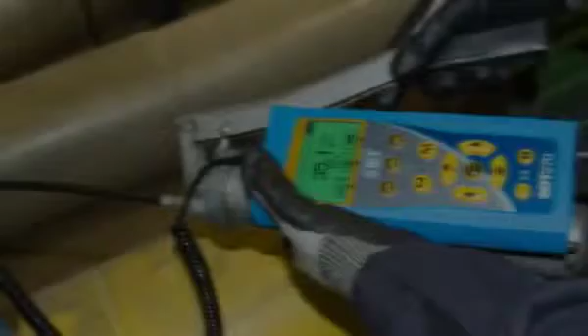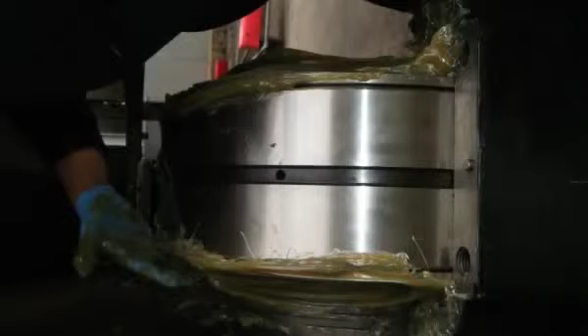Lubricating rolling bearings is one maintenance task that deserves our attention. For those involved with reliability, asset longevity, and energy conservation, getting this job done right means everything. Still, lubrication of rolling element bearings remains a misunderstood and abused task. Can it be true that 40% of all bearings never live to their engineered life cycle, and bad lubrication practices are the leading cause of this infant mortality?

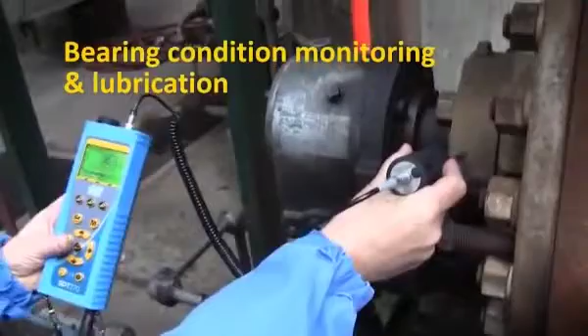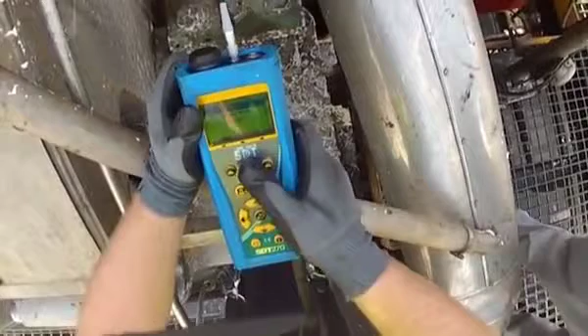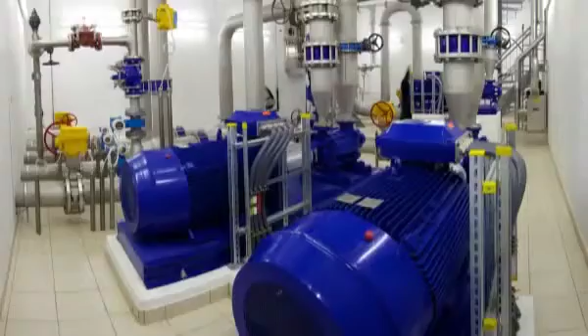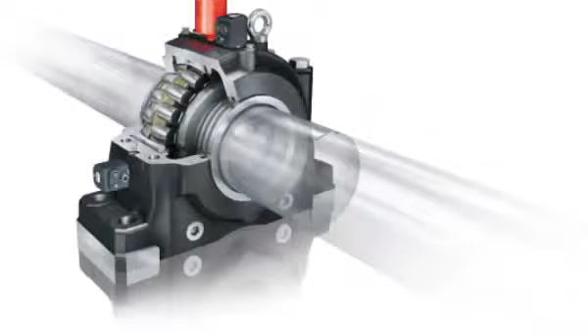Friction is all around us. Without it, we'd find it very difficult to run, walk, or even stand on our own 2 feet. We need friction to drive our cars and fly our airplanes, and we need friction for our motors to drive pumps. But when it comes to our plant, machinery friction is both friend and foe. If part of your job is greasing plant machinery, then you know well the battle against frictional forces that threaten the useful life of rolling element bearings, and you definitely want to avoid these 3 common lubrication mistakes.

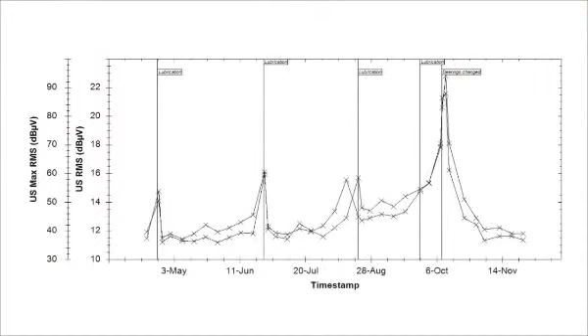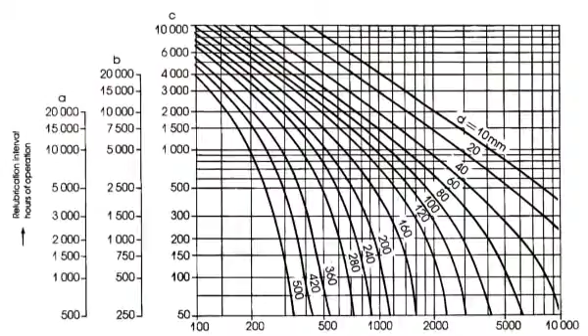Mistake number 1. Scheduling lubrication tasks on a calendar basis instead of a conditional basis. Greasing a bearing once per week or once a month may seem like a sensible thing to do. After all, performing scheduled maintenance at regular periods is an age-old concept ingrained early on. Even OEMs still advise best practices based on time intervals to ensure maximum asset lifespan. Are they right? Or does their advice steer us in the wrong direction?

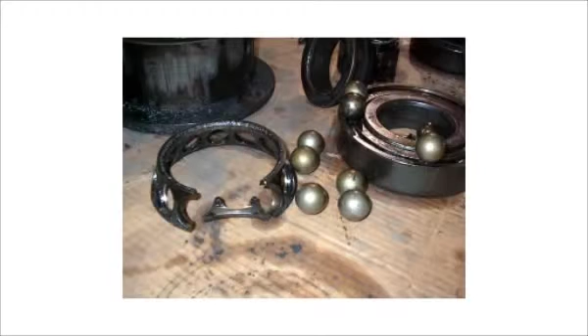Bearings need grease for one reason only, to reduce friction. As long as the lubricant is performing that service well, there should be no need to change it or add more. Yet we frequently do, with potentially catastrophic results. Relubricating a bearing just because your calendar told you time's up is the first mistake you must avoid. Don't let your calendar overrule common sense. Instead, monitor, measure, and trend friction levels and predict precisely the right time to grease.

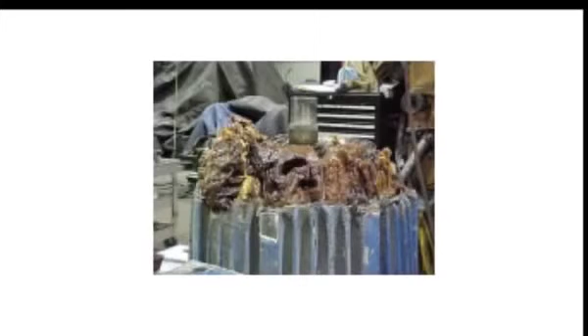The second mistake is adding the wrong amount of grease. Sometimes we add too much, other times not enough. Both are wrong. Too much grease builds pressure, pushing the rolling elements through the fluid film and against the outer race. The bearing has to work much harder to push the rolling elements through a mud bog of grease.

Imagine for a second you're running along a beach, ankle deep in water. Your legs effortlessly drive your feet with each step, while a small amount of water splashes coolly around your ankles. You feel as though you could run forever and never get tired. Now imagine running knee-deep or even waist-deep in water. Your legs tire quickly. The water surrounds you and makes movement feel awkward and unnatural. You might grunt, you might groan and strain until, after a few seconds, you give up from exhaustion.

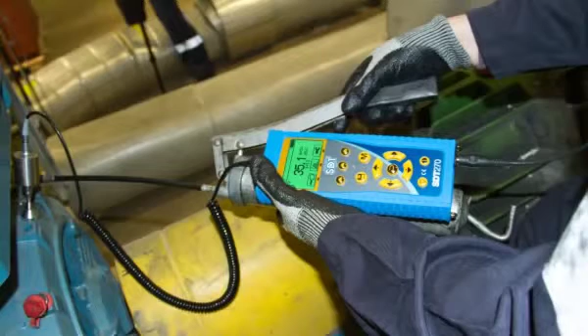A bearing drowning in grease will run hot. Excessive heat breaks down the grease. The whole system is an inefficient waste of energy. How do we avoid this mistake and stop at just the right amount of grease? By monitoring the bearing's friction level with ultrasound as new grease is being applied. As new grease flows into the bearing cavity, a measurable change in ultrasound levels is measured, heard, and recorded with an SDT LubeTech kit. As the decibel level approaches normal baselines and stabilizes, you know only the needed amount of grease has been added.

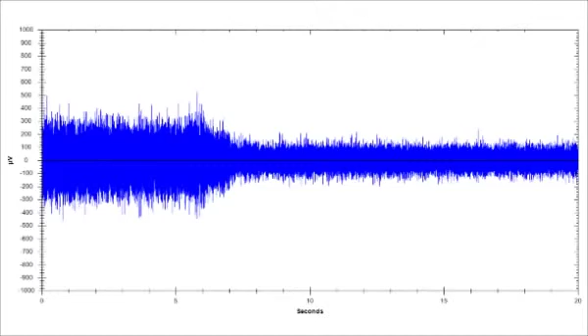Like any job, there's a right way and a wrong way to do things. Simply listening to a bearing with an ultrasound device that gives no quantitative feedback is a recipe for disaster. The audible feedback is too subjective to draw any comparative conclusions. No 2 people hear the same, and there's no way to remember what the bearing sounded like a month ago.

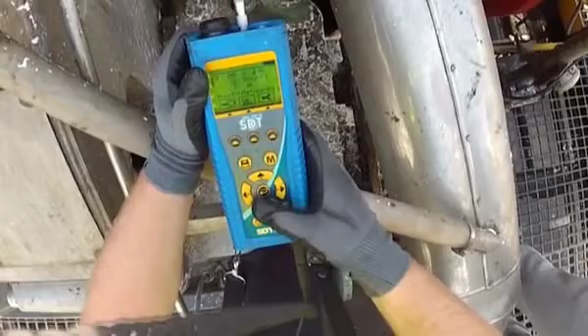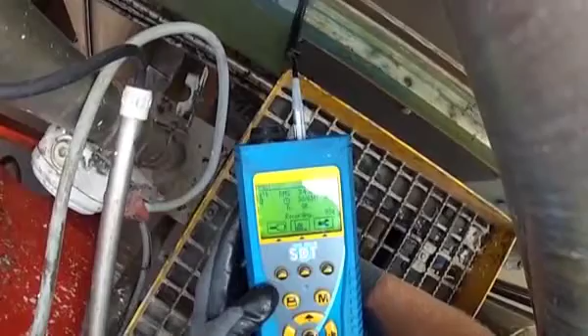So what's mistake number 3? Sacrificing quality for price. Always use an ultrasound instrument that provides a digital decibel measurement. Do not rely on stethoscopes, screwdrivers, and listen-only ultrasound instruments. Better still, use a device that provides multiple condition indicators. Max and peak RMS decibel measurements indicate alarm levels and greasing intervals, while ultrasonic crest factor provides insight about the bearing condition in relation to its lubricant. Crest factor helps us differentiate between bearings that need grease and bearings that need to be replaced.

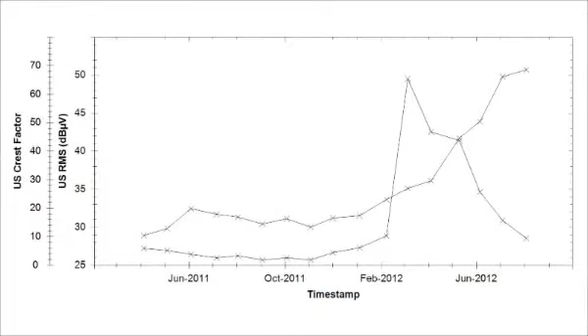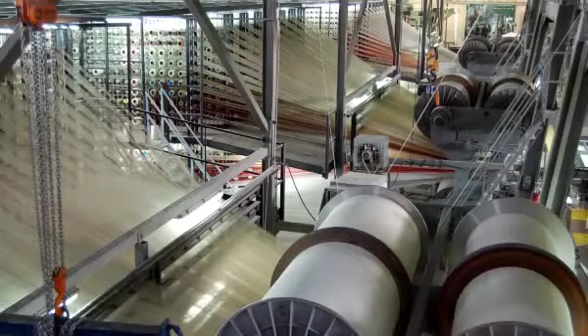Bearings reside in noisy places. Deafening, really. So many sources of noise coming from all directions. Humans are simply incapable of filtering the sound of a grease-starved bearing from other sounds. Even if we could, how would we measure the results? How can we compare what we hear today against what was heard a month ago?

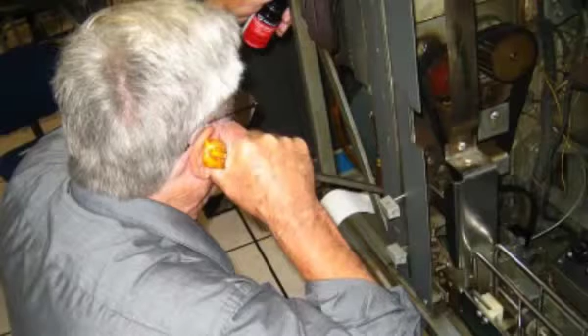The days of listening to a bearing with a stethoscope, screwdriver, or broomstick are over. There's just too much at stake to rely on antiquated methods. But noisy environments are where high-quality ultrasound instruments thrive. These are the challenging situations they were built for.

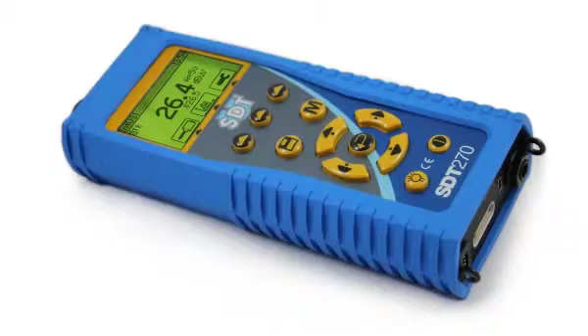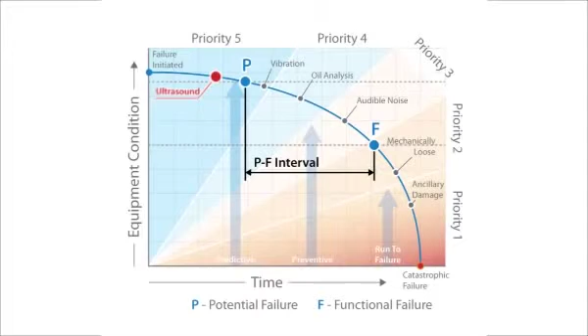Take, for example, the SDT-270. It hears above the noise of the factory floor and concentrates on a narrow band of ultrasonic frequencies. Friction and bearing defects first reveal themselves in this frequency range. The SDT-270 accurately filters, measures, stores trends, and alarms the earliest signs of lubrication and bearing failures, making it the ideal tool to predict greasing requirements.

It does so by providing 4 relevant data sets we call condition indicators. Condition indicators characterize the health and performance of a machine and provide more insight as to what has changed. The first condition indicator is overall RMS, reported in decibels per microvolt. Overall RMS is an averaged calculation of negative and positive values collected over a specified sample time. That sample time is defined by you, the ultrasound inspector.

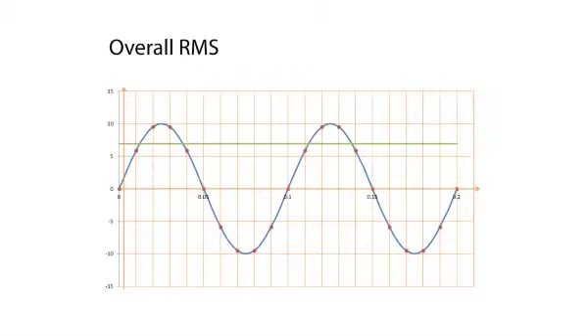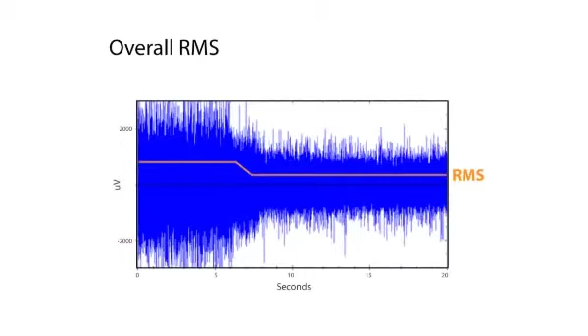The SDT-270 reports the RMS by buffering 250,000 samples per second. This condition indicator characterizes the energy inherent in the ultrasound signal. RMS incorporates both friction and impulsive ultrasound over the sample time. It's a stable and repeatable value, making it an ideal value to trend and alarm to.

The next condition indicator is max RMS. We also calculate that in decibels per microvolt. The SDT-270 actually calculates RMS 2 ways. The first I just described. It's an overall value for a specific time frame sampled at 250,000 samples per second.

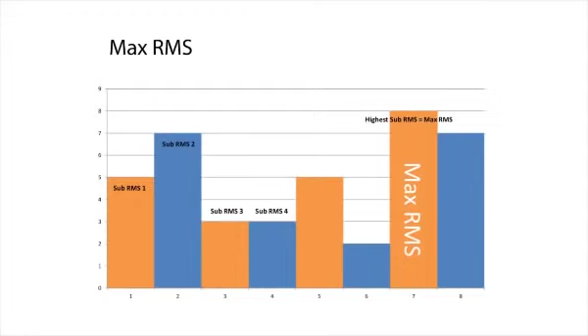The second we call a sub-RMS. The sub-RMS consolidates the RMS into blocks of data 250 milliseconds long. So an RMS collected over 1 second would contain 4 sub-RMS blocks. The loudest block reported represents the max RMS. The max RMS is used to compare against the RMS to determine if the signal is stable.

The next condition indicator we call the peak value. It's the maximum instantaneous value recorded during the measurement cycle. Since the SDT-270 takes 250,000 samples per second, the peak condition indicator is extremely sensitive to any abrupt variation. This makes it really useful for detecting impacts produced by early stages of bearing failure.

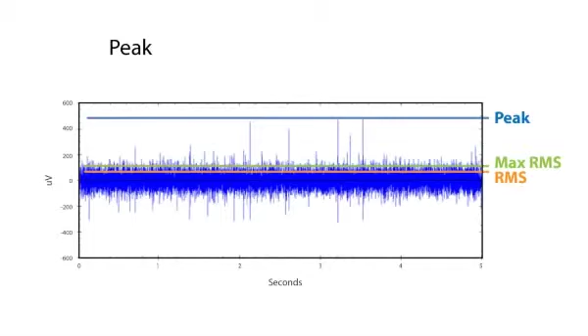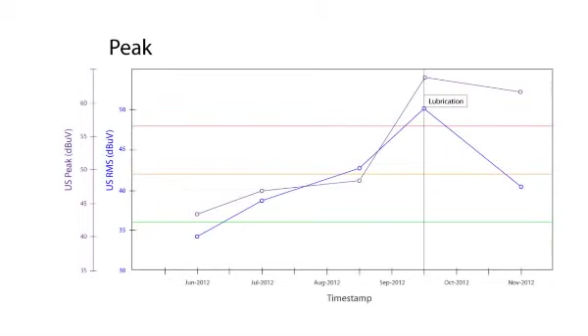For example, let us say that an alarm was triggered when the RMS value exceeded 8 decibels per microvolt over its baseline. If lubricating that bearing returns its RMS condition indicator to baseline, but the peak value remains elevated, this is an indication that the alarm was triggered by more than just lubrication issues. The bearing is entering early failure stages.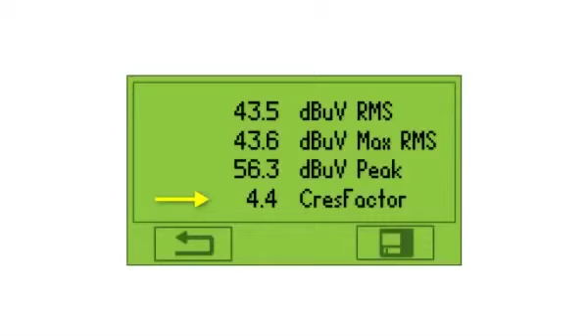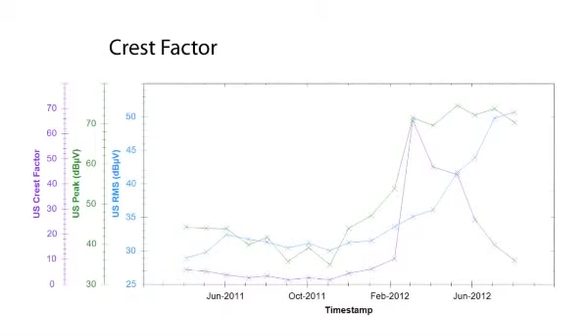The fourth condition indicator is crest factor. Crest factor is simply calculated by the SDT-270 as a linear ratio of the peak value to the RMS value. The beauty of the crest factor is how it reacts to unstable bearing signals. This makes it useful for estimating the failure severity of bearings and gears.

When ultrasound inspectors put all 4 condition indicators to work, they have the power to predict lubrication requirements based on condition instead of time. RMS tells us when to grease, and more importantly, when to stop greasing. Max RMS and peak give an indication that an increased RMS value may be more than just friction at play. Crest factor helps track the evolution of failure from first to final stage. SDT's condition indicators present a fuller picture of bearing condition and take ultrasonic decibel metering to a new level.

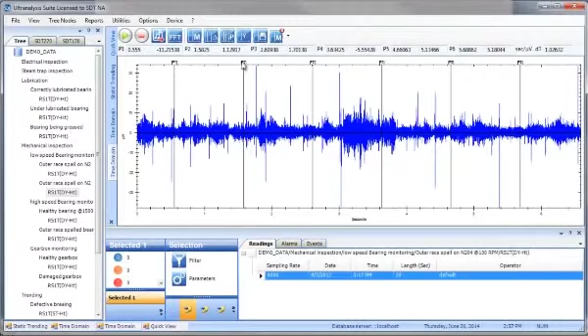For those who want analysis beyond static condition indicators, SDT offers dynamic data analysis. Static condition indicators are useful for trending and alarming, but dynamic data analysis goes deeper and provides a visual representation of the ultrasound signal. Ultrasound data presents well in the time domain. Visually, it helps explain changes in static condition indicators.

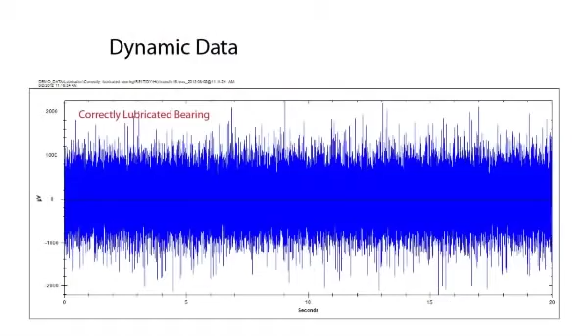To demonstrate, let's take a look at two identical bearings. One of the bearings is correctly lubricated and the other is under-lubricated. We captured dynamic signals 20 seconds in length for each bearing. The first thing we need to do is scale the y-axis of each time graph identically so we can compare them side by side meaningfully. Let's look more closely at the correctly lubricated bearing first.

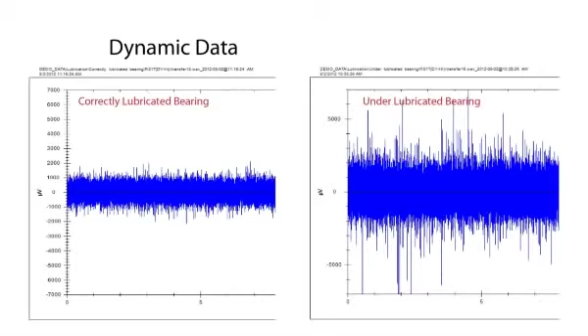The static RMS condition indicator is 51.2 decibels per microvolt, and the max RMS is similar at 51.7. A peak ultrasonic value of 67 is notable, but not alarming, and the crest factor is 6.17. Now compare this to the companion under-lubricated bearing.

Overall RMS of 57.8 and max RMS of 58.7 is about 6 decibels higher than the correctly lubricated bearing. The friction level is 2 times higher in the under-lubricated bearing. The peak level is 12 dB higher, which is 4 times higher than 67.

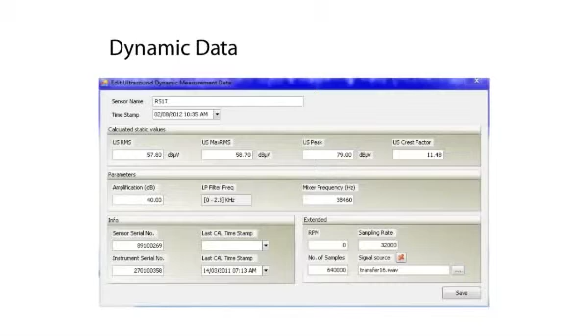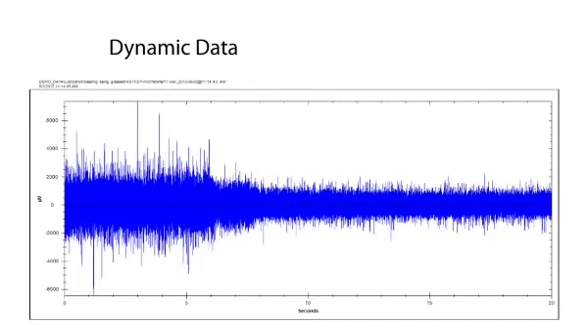Let's take a look at creating an ultrasound greasing program. Success is dependent on organization and commitment. Without these two structural elements, your ultrasound lubrication program will find difficulty getting traction. However, with well-organized execution, the program will be on a solid footing from the outset.

Getting the commitment from all levels comes much easier when a program can demonstrate structure and cohesion. Results will prove the program faster, which will trigger easier access to funding to grow and sustain the program. There's only one clear way to create organization around a project, and that's to define goals. So start by asking, why are we starting an ultrasound lubrication program? And what rewards do we expect to reap?

There is no one easy answer to that question, and probably several that make sense. Saving money is an obvious benefit that gets the attention of management, but it's not specific enough. How will an ultrasound lubrication program save your company money? By reducing grease consumption, by raising awareness of the right types of grease to use, by making more effective use of lube tech's time, by extending bearing life, by decreasing energy consumption from overgreased motors, by contributing to a mentality of best practices that positively infect other aspects of your business.

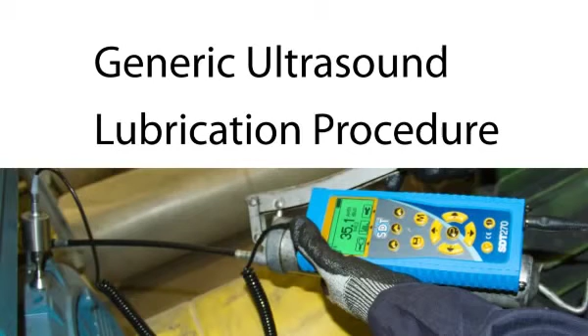SDT has published its recommended best practice for lubricating bearings on an ultrasound condition basis. Every plant is different, but there are basic similarities that make a general procedure for ultrasonic lubrication relevant. This general procedure is meant as a guideline to be used to build out a more specific procedure for you. This may be an exercise best undertaken with the guidance of your ultrasound implementation consultant. At the end of this presentation, you can request your own copy of SDT's ultrasound lubrication procedure.

How often should machines be greased? Well, there's no easy one-answer-fits-all to this question. Presuming that full faith in ultrasound condition-based relubrication is engaged, we can approach the answer with this simple logic. Why do bearings need grease? To reduce the frictional forces between the surface of the bearing's rolling elements. Okay, so when does new grease need to be added to a bearing? When the bearing's frictional forces increase beyond a set quantifiable level.

What is a reliable and easy-to-use technology that determines changes in frictional forces? Ultrasound. Back to the original question then. How often should machines be greased? The answer must be when your ultrasound technology reports an increase that's 8 to 10 decibels louder than your established baseline. Knowing that 6 decibels over baseline represents a 2 times increase in frictional levels, 8 to 10 decibels RMS is logarithmically and logically an intelligent point to create a relubrication interval alarm.

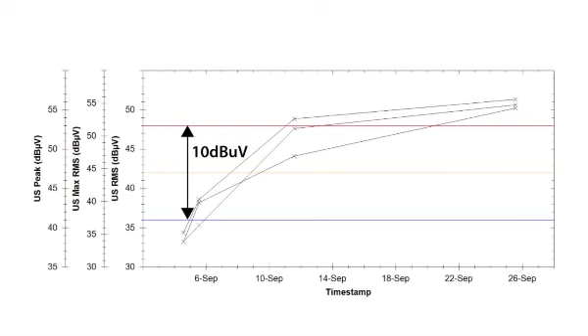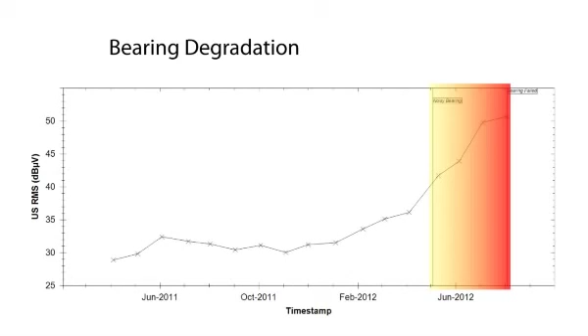This sample trend graph shows a bearing's degradation over a 12-month period. The baseline ranged between 29 and 32 decibels for the better part of 10 months. Around May 2012, the bearing breached the 40 decibel mark for the first time. That represents an 8 to 10 decibel increase over baseline. This should have triggered an alarm for intervention. Lubrication of the bearing at this point to return it to baseline may prevent a further breach above 50 decibels and the next stage of bearing failure.

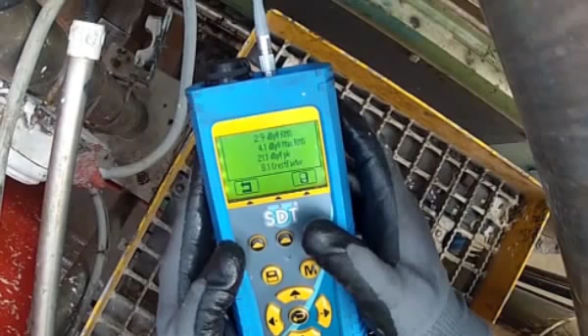Avoid these 3 common mistakes. Grease on a conditional basis rather than a time basis. Add the right amount of grease without over-lubricating. And use a digital decibel metering ultrasound detector instead of a listen-only tool. Now, you're well on your way to establishing a world-class condition-based lubrication program. Next step?